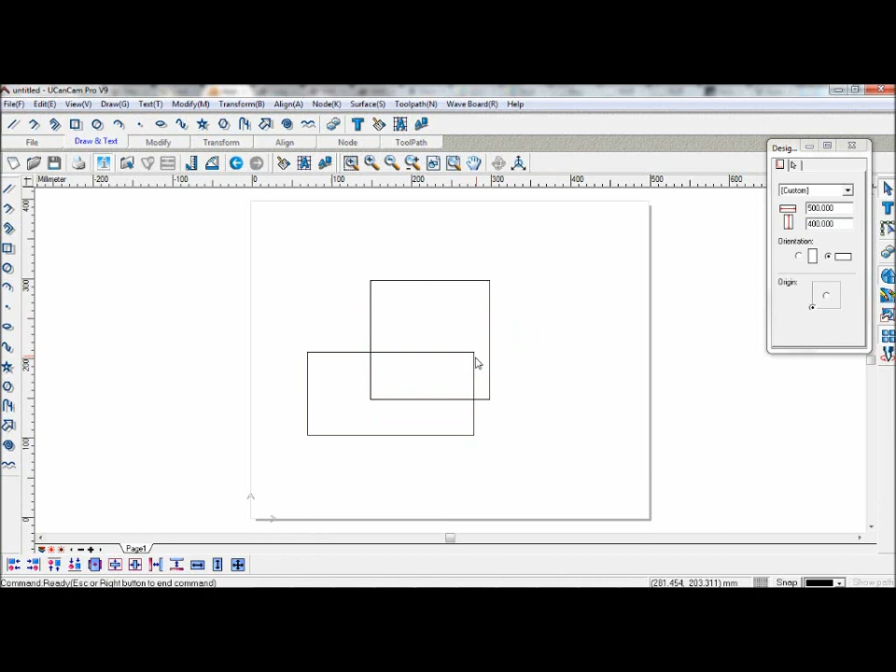You can also use your Design Central to edit them. For example, selecting the rectangle, you can see the width and length as well as the positioning of the rectangle.

You can change them to your settings, and if you untick proportion, you can change it as you wish without keeping the original object's proportion.

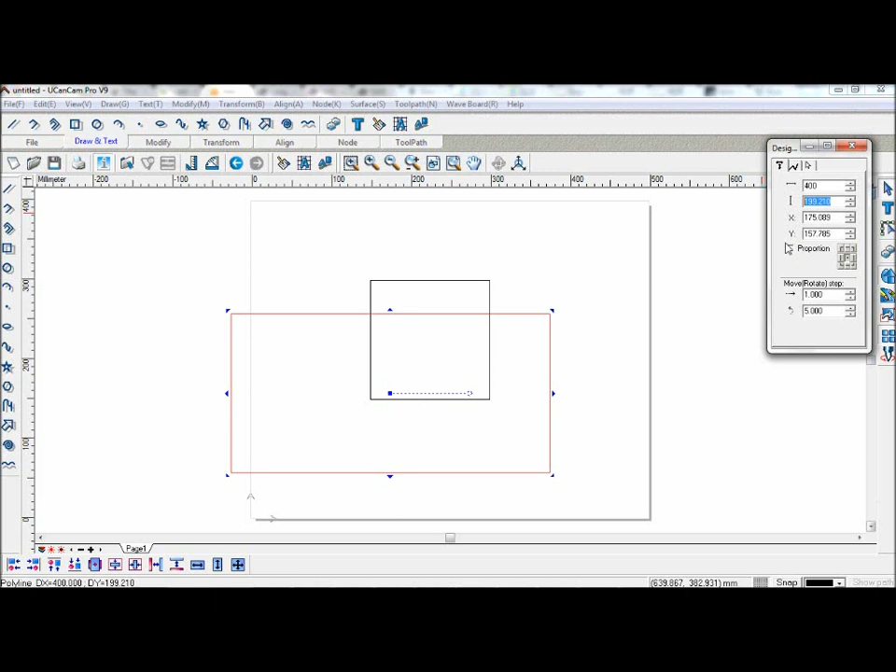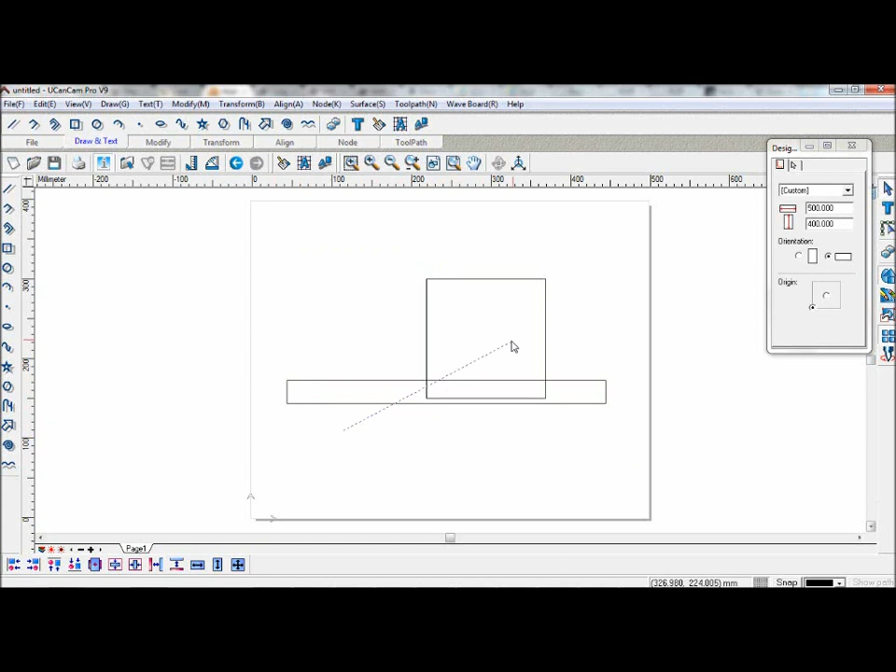To select multiple objects, hold Shift and click the objects. Alternatively, you can draw a box around them, or hold Control, click and drag. When you see the blue dotted line, everything it intersects with will be selected.

There are many shortcuts which you can use to make drawing easier. For example, to rotate the graphs, select it and press Shift Space, and it will rotate the graph by 90 degrees.

You can rotate multiple objects as well. By pressing Shift Space, they will rotate along the center axis here.

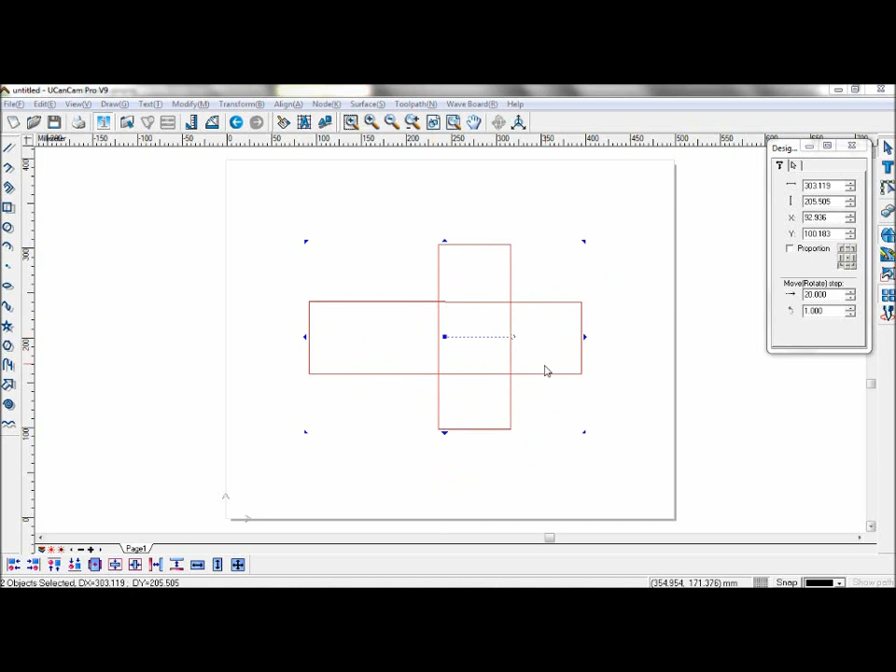To zoom in and zoom out, press Page Up to zoom in and Page Down to zoom out. Alternatively, you can scroll on your mouse, or if you wish to zoom in on everything, press F8.

If you wish to zoom in on a certain area, you can press F6 and draw a box to the area you wish to see.

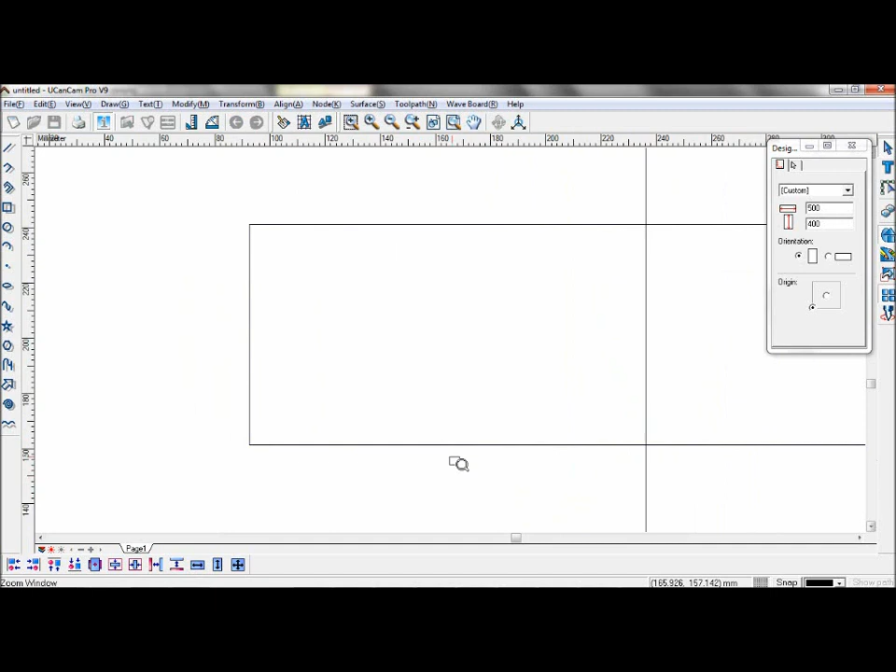If you need to refresh the screen, press F5.

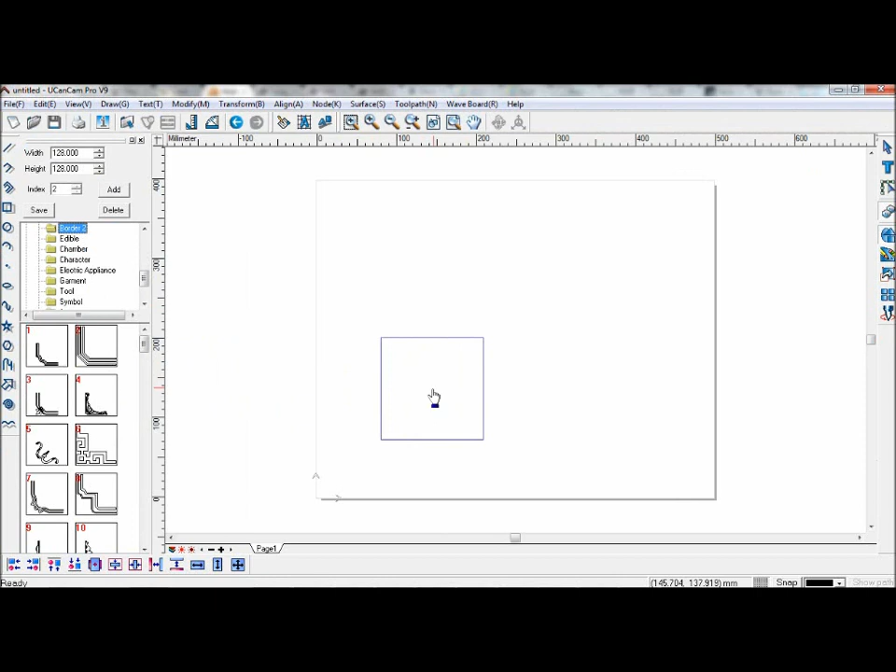UCanCam has an abundant symbol library. You can select the one you want, and if you wish to insert one, simply click and drag into the active area, and you can modify it like any other graph or vector.

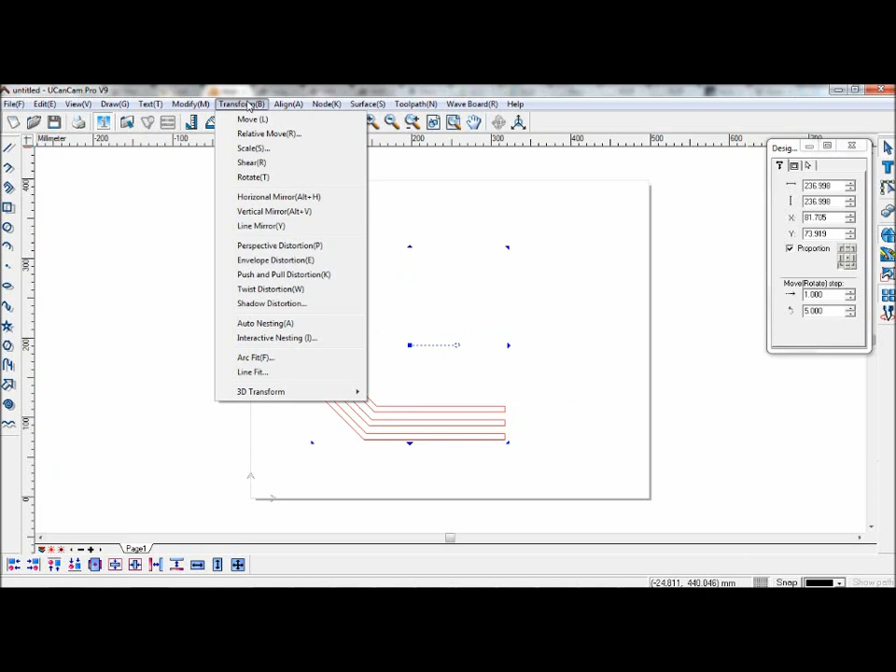If you wish to modify them differently without using the Design Central, you can go to Transform, and there are many options for you to select here, such as Scale.

You can keep the X and Y ratio, and you can also change them according to percentage, or enter your own numbers here.

You can also choose the base point. Keep original will keep the original object if you wish to do so.

And as you can see, the object has been modified. You can also change them in the Design Central.

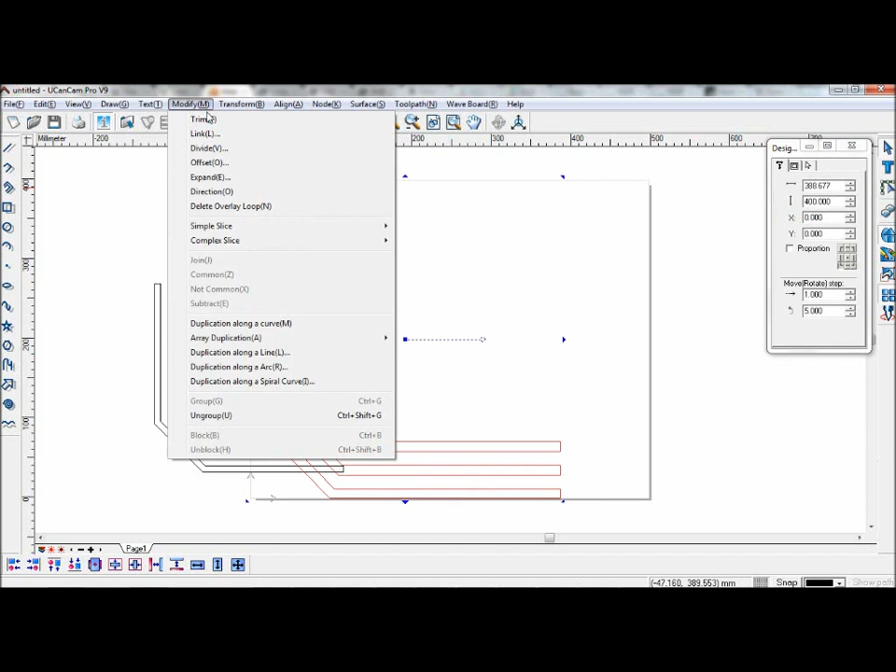To modify these graphs, select them, go to Modify, and you have another list.

To modify these graphs, go to Modify, and Trim.

And to delete some of the lines, hover your mouse over the part where you wish to delete the lines, and when you see it has become the blue dotted line and the scissors, left click, and you will trim the objects.

To connect the lines again, hover your mouse over where the line should be. When you see the mouse is like this, with the dotted lines, left click, and they will connect.

To separate the lines, or break them, hold Control when hovering your mouse over them. When you see it has become the hammer with the blue dotted lines, left click, and you can see that it has become disconnected from the original.

If you wish to stop editing, you can right click or press escape.

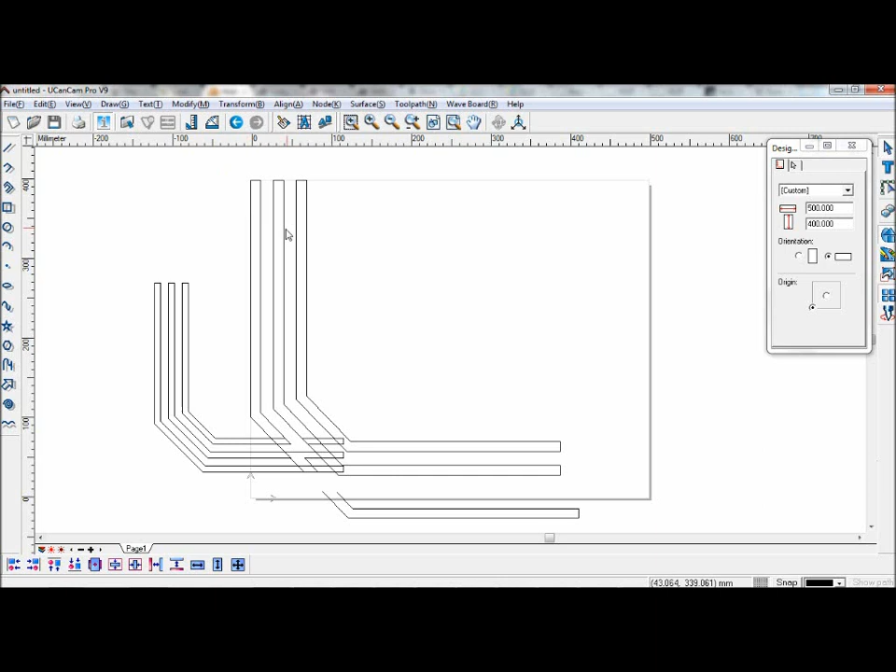Let's look at some other options, such as offset. Using the symbol as an example, you can set the distance, and you can set the direction of the offset to be outer or inner, and you can change the type of corner the offset will have.

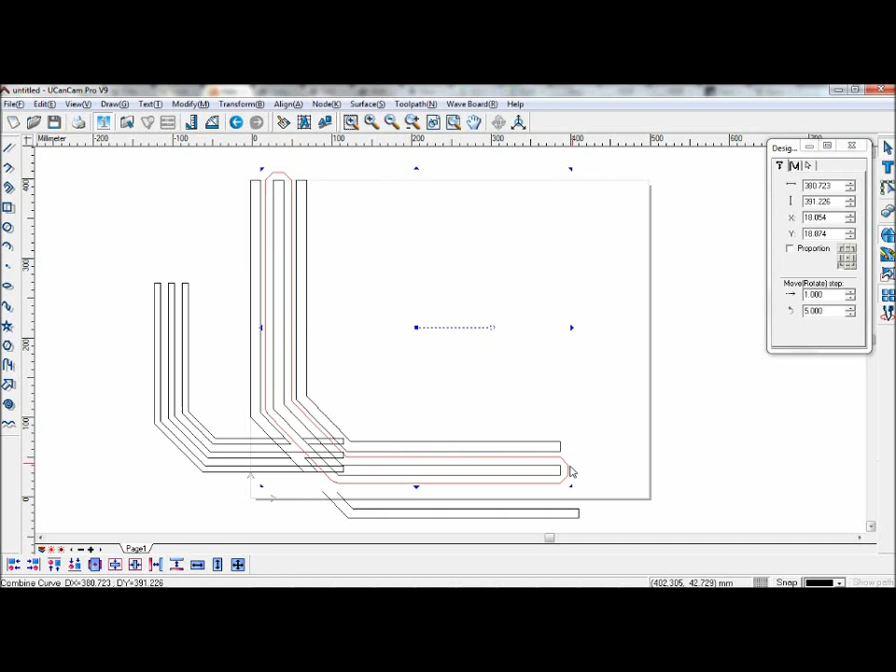And you can see that it has created the offset according to your specifications.

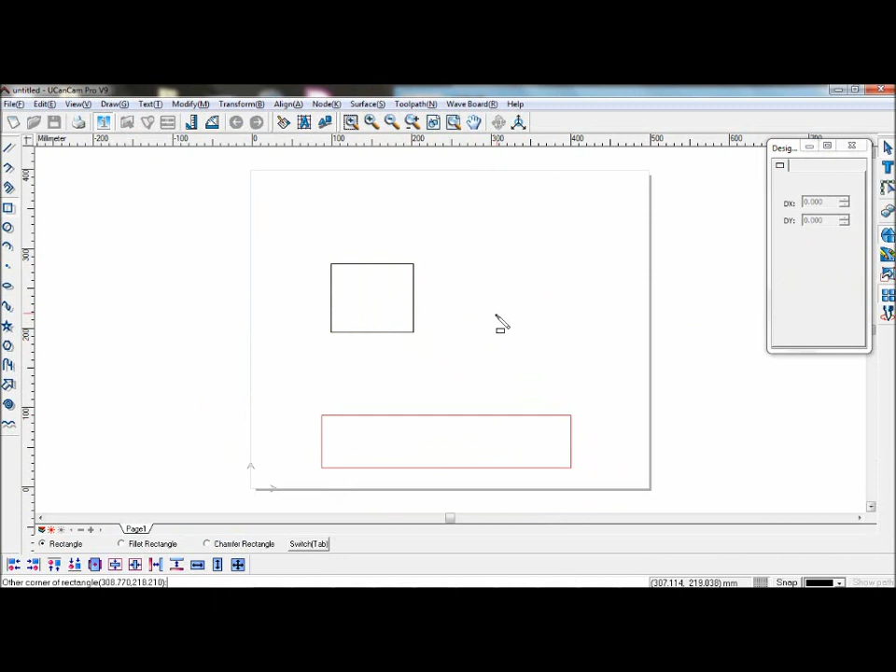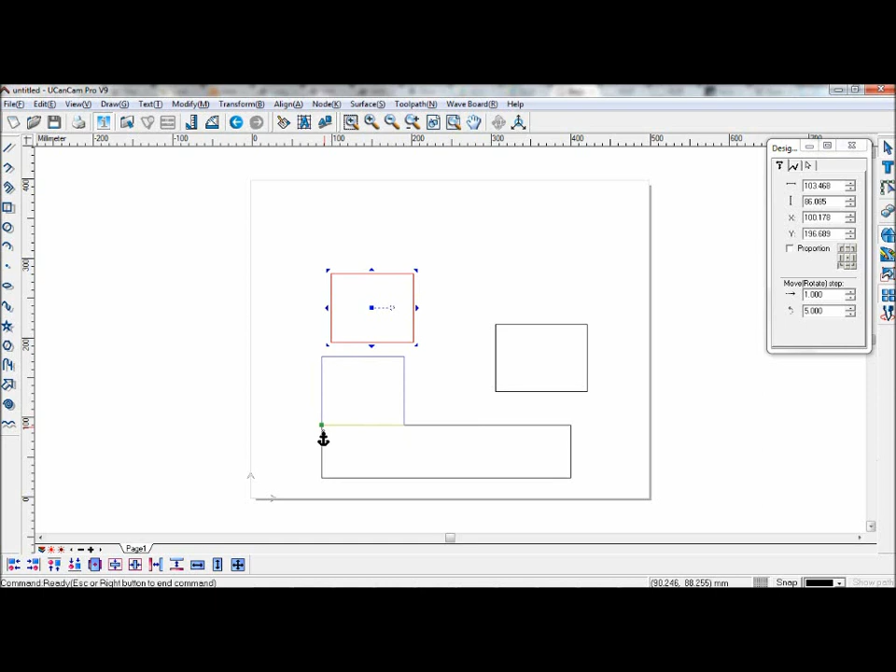You can also align objects. UCanCam has a locate and an align option. For example, hold Alt and move your mouse over the object until you see a green square by one of those corners. Now drag it until you see the green square again, and it will connect the two corners of these objects. This will also work if the object has been rotated.

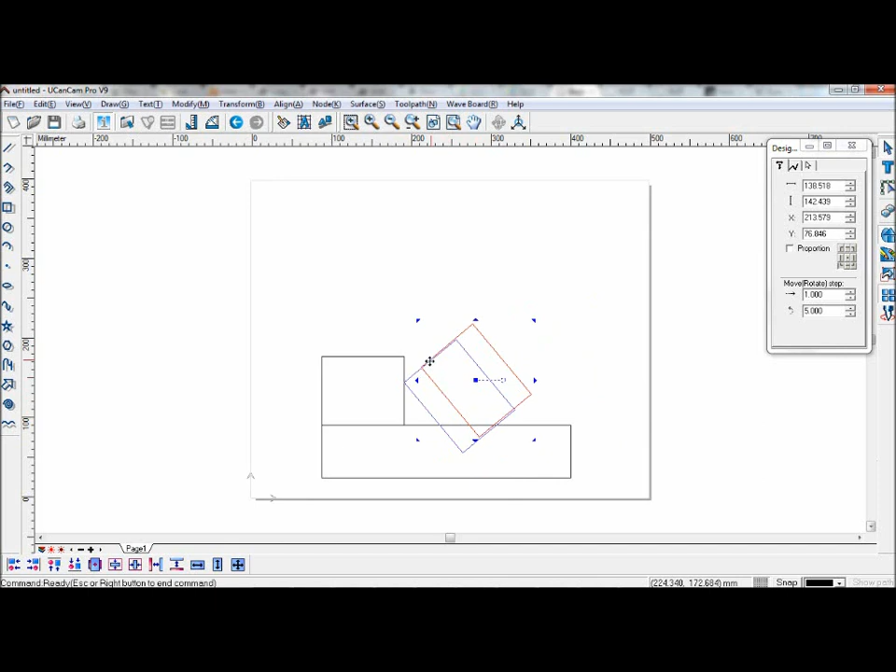And you can connect the objects by doing this. Instead of just connecting the starting and end points, you can also connect the sides. For example, selecting the middle of the side and connecting it to the other side of the square. This should allow you to move precisely.

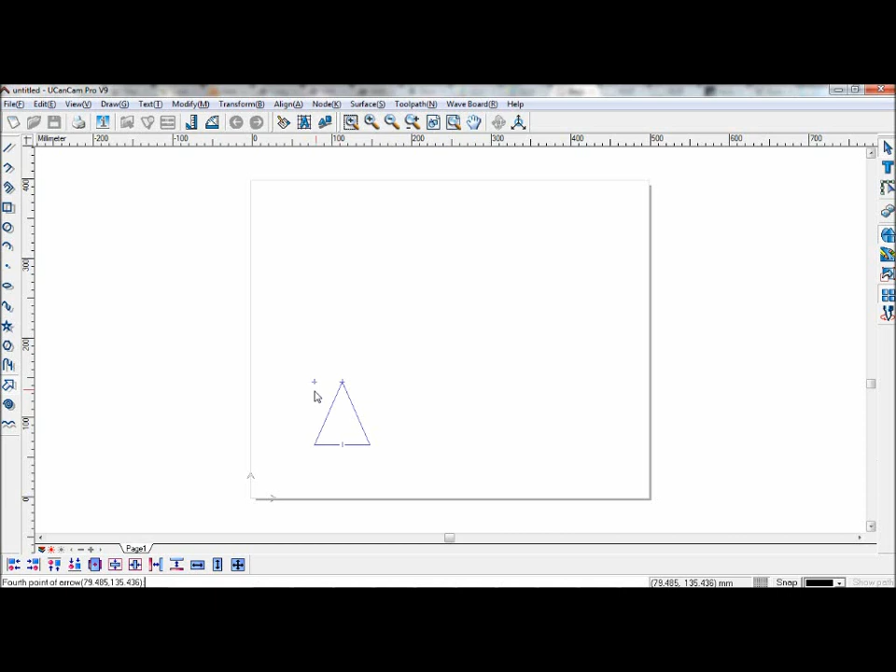You can also duplicate the objects. For example, select the object, go to Modify, Array Duplication, and go to Rectangular Duplication. Here, by dragging the black square and changing the size of the rectangle, you can change the size of the array.

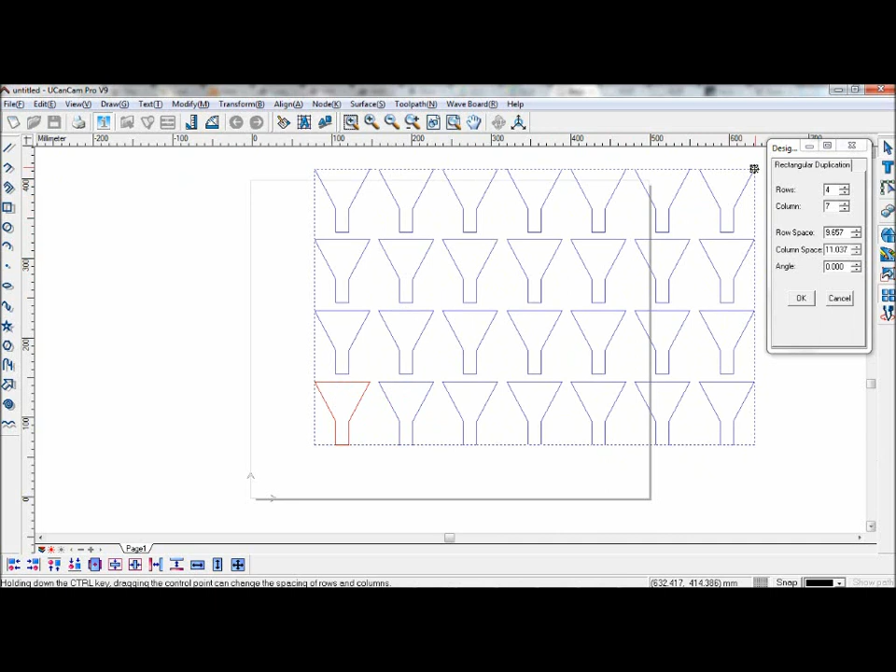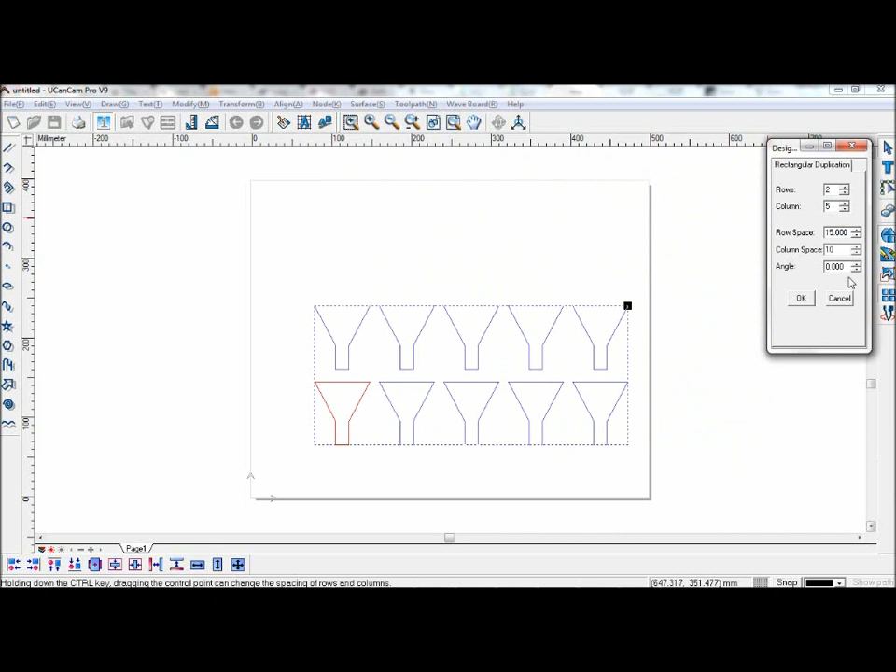If you wish for the object to be duplicated within the same size, but without changing the array, you can hold Control and move the black square again, and this will change the space between the objects. Alternatively, you can change them in the Design Central, and you can also change the space between them, and the angle they are duplicated over.

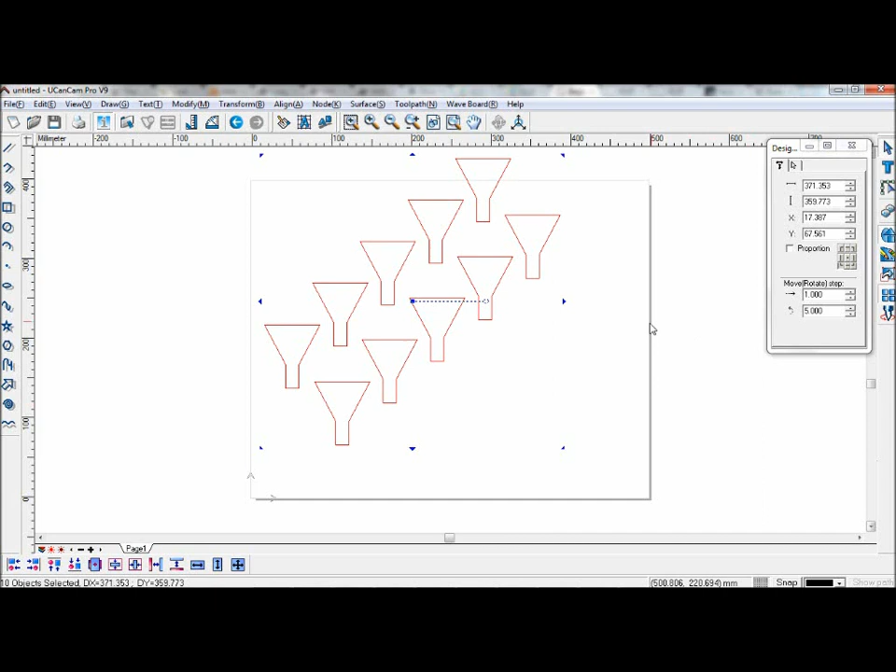If you wish to move the objects according to a certain parameter, you can change the move step here. For example, right now, every time you press a key in your direction pad, it will move the objects by 1 millimeter. If you change that to 20 and press the direction pad, it will move the objects by 20 millimeters each time.

And if you wish to rotate the objects by 5 degrees each step, or 30 degrees, select the objects again, hold Control, and press either the left or right direction key to rotate the objects. As you can see, they will be determined by the move or rotate step.

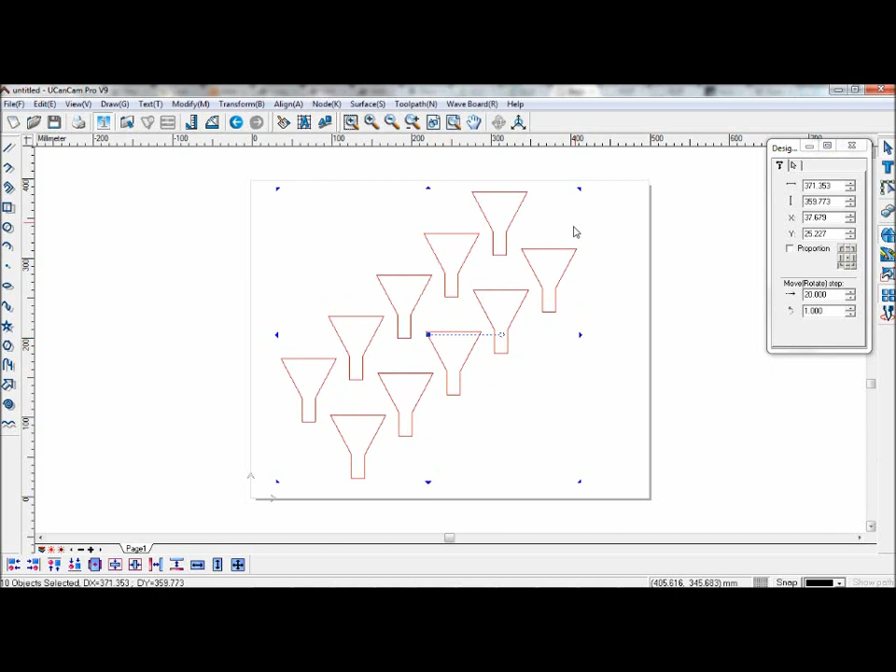However, if you wish to create a circular array duplication, you can do that as well. Select the object, go to Modify, Array Duplication, Circular Duplication, and you can see that it will be duplicated in a circular fashion. Once again, you can set your parameters in the Design Central.

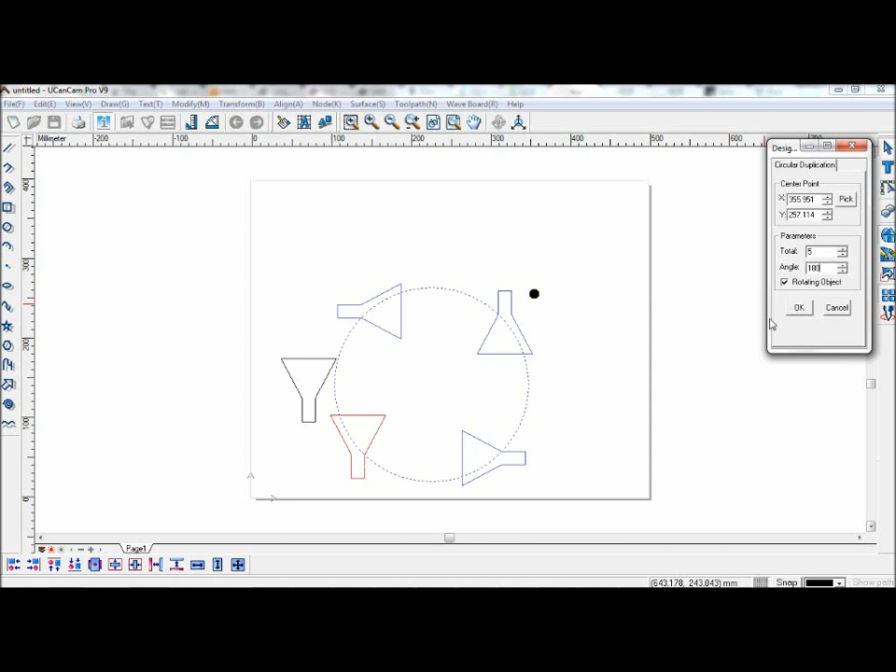You can select the center point or pick it, and change the total amount of arrays duplicated. You can change the angle that they're duplicated over as well. For example, instead of duplicating over a 360-degree angle, you can duplicate it over only 180 degrees. This will form a semicircle.

As you can see, the objects were duplicated over a semicircle, with each of them rotating along the path.

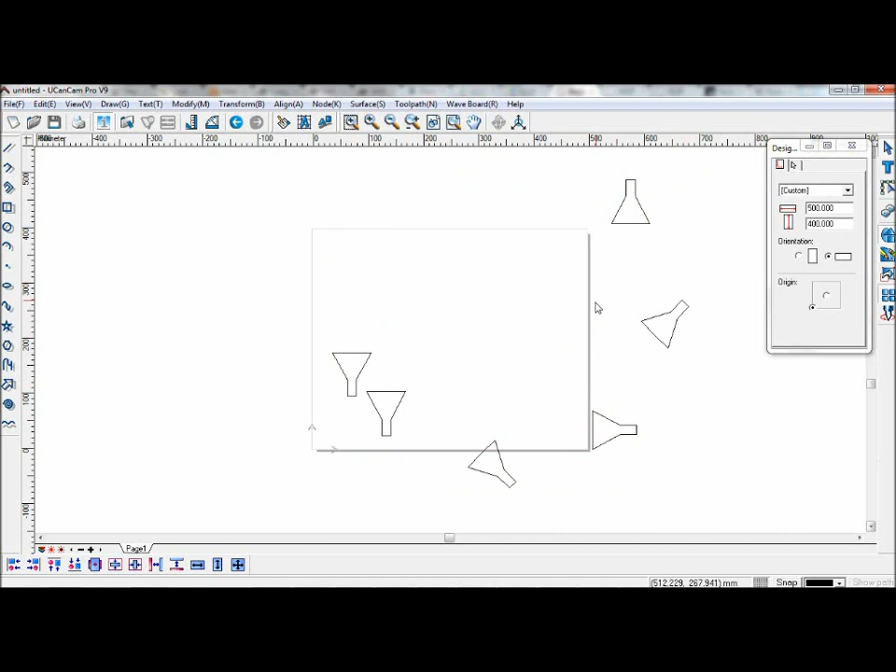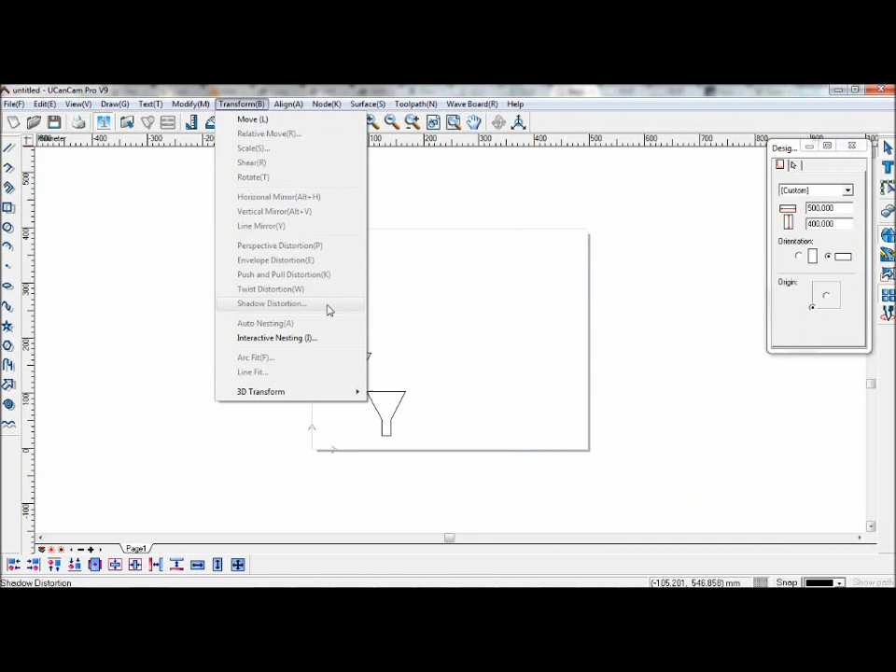UCanCam has artistic transformation options built in, such as perspective distortion, envelope distortion, push and pull distortion, twist distortion, and shadow distortion. Here we can demonstrate each of these distortion options.

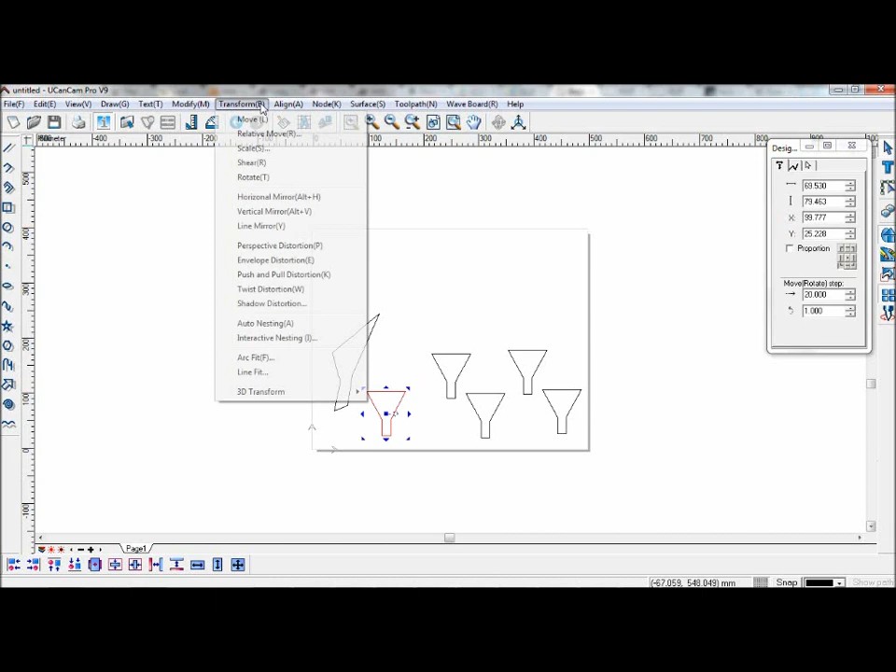Envelope distortion. You can choose how the object will look by changing how it is enveloped.

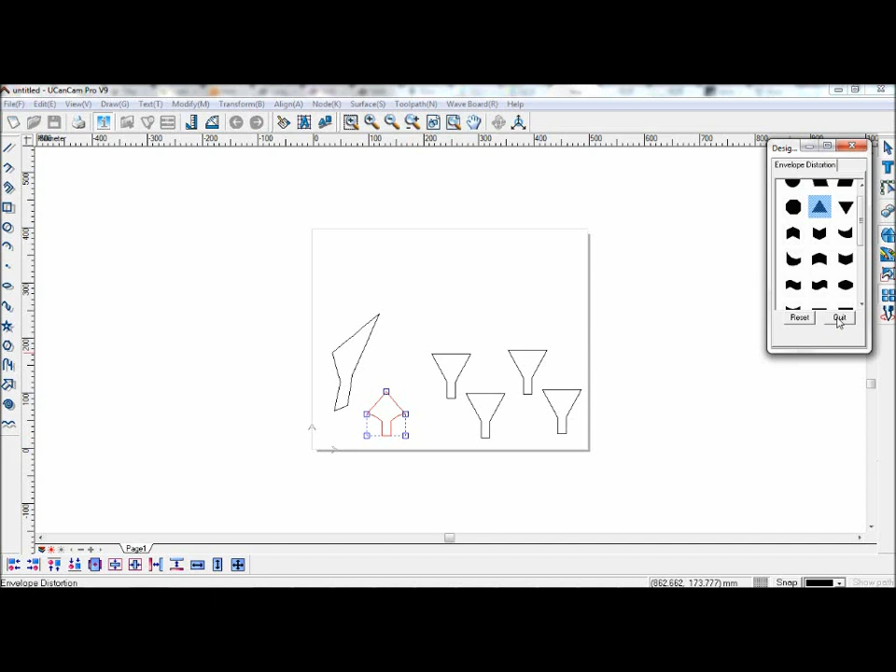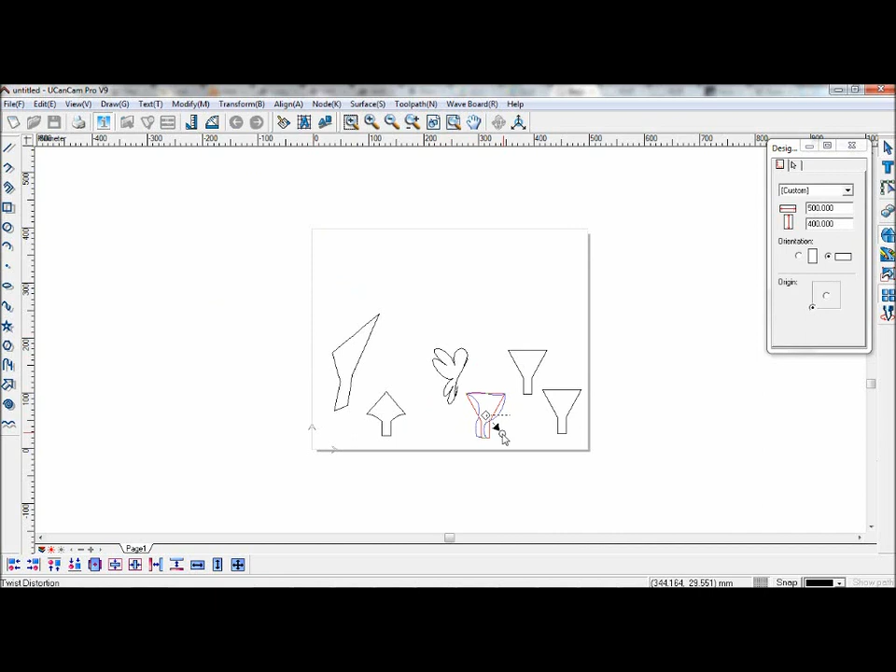Push and pull distortion. Twist distortion. And shadow distortion.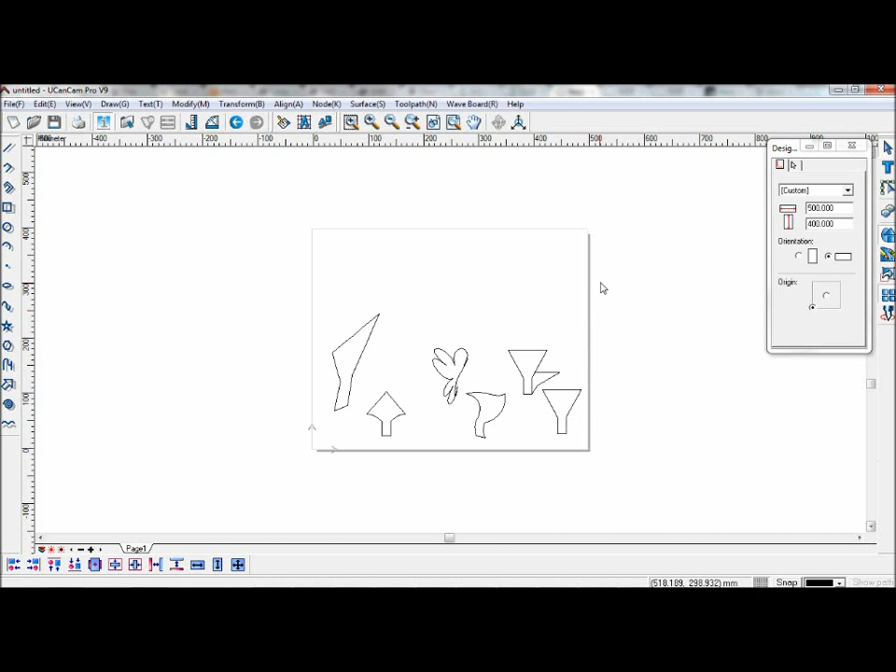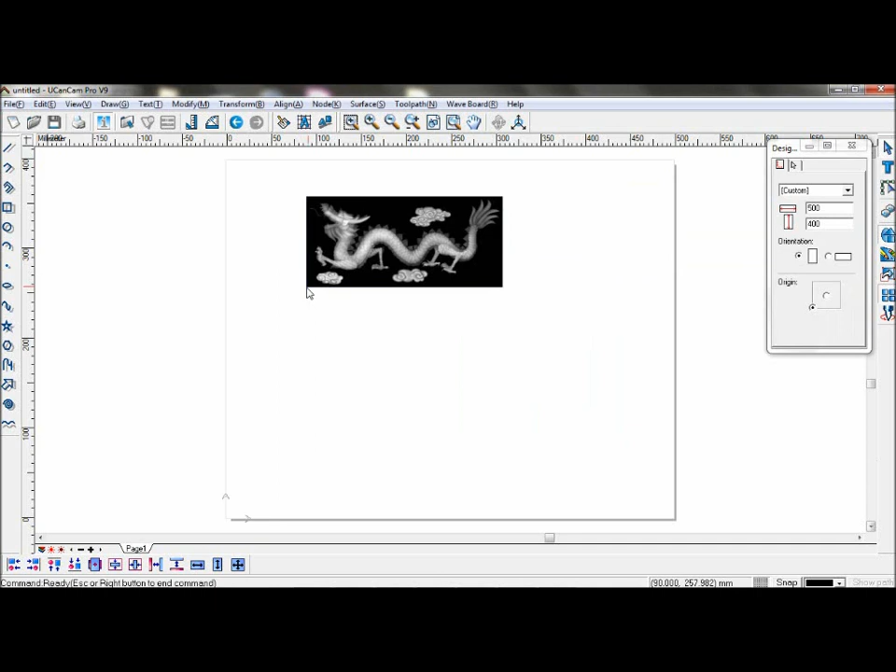If you wish to import an object into UCanCam, go to File and Import. Here, select the file type that you wish to use, such as image files, JPEG files, bitmap, or any other file type that you see here.

Some of them will be compatible with UCanCam, and you can start editing them straight away. For those that are not, press Ctrl+R, which is the hotkey for importing the file. Press F6 to select the area to zoom in on.

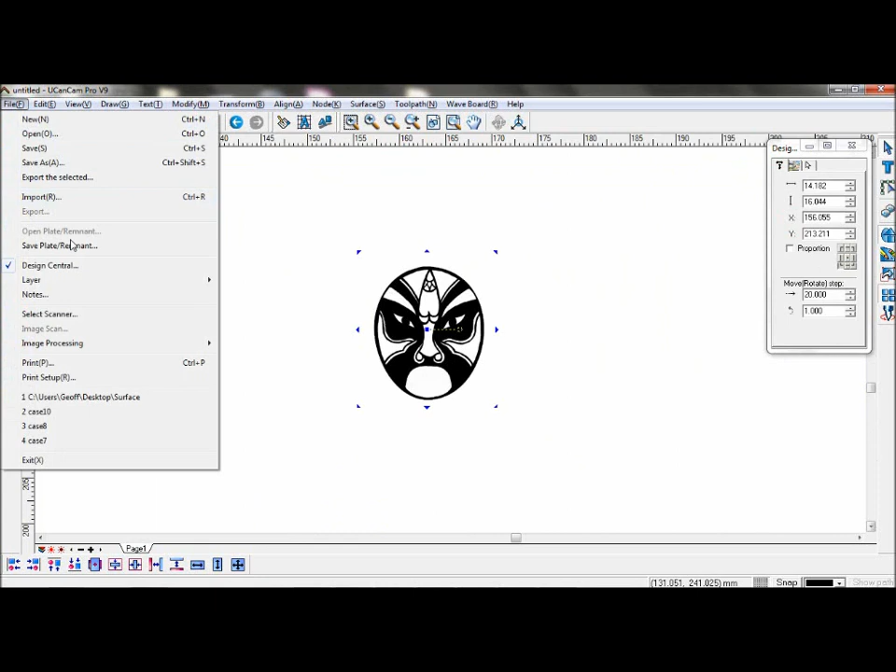You can use image tracing. For image tracing, select the object you've just imported. Go to File, Image Processing, and Image Tracing.

Here, set your parameters. You can press Default to have the default settings, or you can change them yourself. If you wish to preview the object, press this button here and click Preview, and it will draw the preview of what the image tracing would look like.

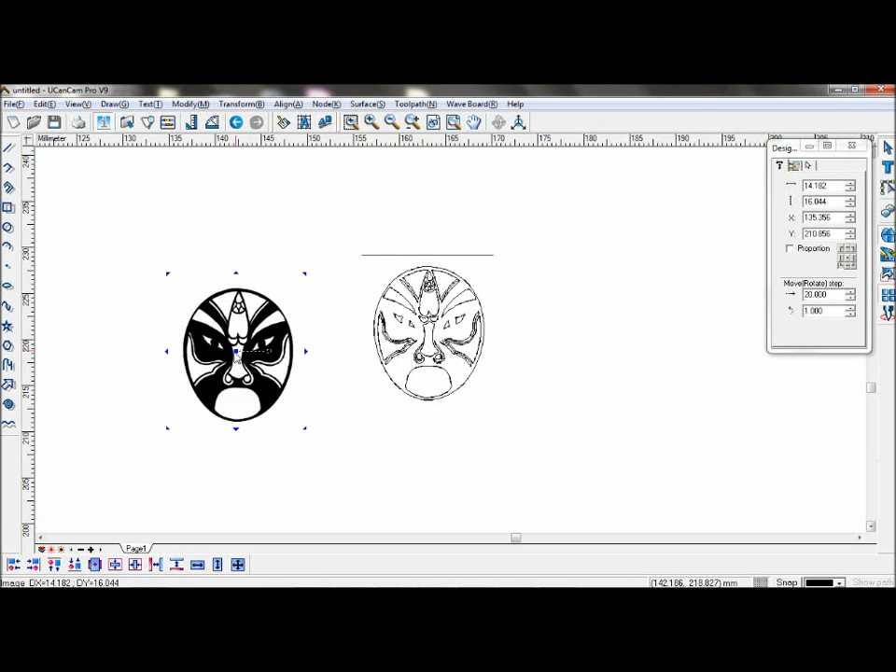You can make the image clearer by increasing the level of Despeckle, which will decrease the amount of things traced until you are left with the most basic outlines. Click OK and move the object away from the area, and you can see that the image has been traced. And you can edit them as you like.